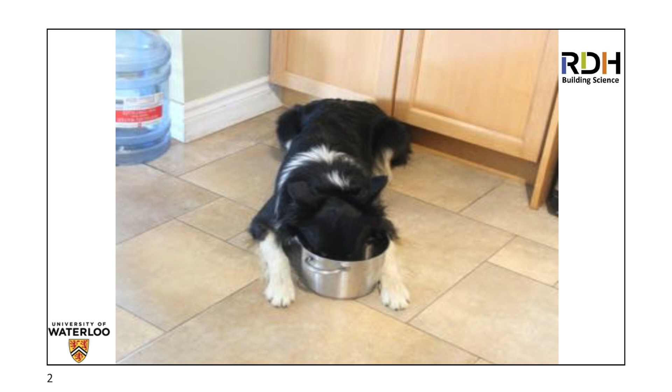Now, I also recognize that I had to have dog pictures in the presentation, so I managed to update this over lunch. This was you folks only half an hour ago. Right now, I want you to be like this. I am paying rapt attention, and in the next hour, I want you to do that.

When I point out some of the physics behind everyday moisture events, I'm going to talk about capillary, or capillary forces, I'm told it's one or the other. We're going to apply this to drainage of walls, leakage of windows, rain penetration.

My focus, other years I've talked about pores and how water is wicked into, say, brick or wood, and those are tiny pores. We're going to look at the comparison and why it's actually different when we get a little bit bigger. That transition is what matters from a building science point of view.

So I actually gave a size range there, 0.02 inches to 0.5 inches, for very important reasons. This remote control is not very remote.

So yeah, capillarity has been around for a long time. One of the drivers behind this presentation was some legal work I was doing, and I assumed that experts testifying in a legal case would know about capillarity and which direction it acted and the relative magnitude. I was a bit surprised and taken off guard that they didn't.

A big part of what we've done a lot, we call it our Alexandria project, actually Alex Lukachko coined that, about scanning really good research and putting it digitally online, because then it exists again.

The last person's name on this list, James Jurin, is actually one of the people most often given credit for the law I'll describe to you for capillarity. But the problem with James Jurin is he just proved and identified capillarity and showed its significance. The people who put math to it were Laplace and Young, and so oftentimes that's who gets named. They did nothing about the capillarity experiments themselves, but what they added was a mathematical understanding. So you might hear those names sometime.

Just going to quickly talk here. I always talk quickly, I guess. I'm going to have a short chunk where I talk about background science. That was a bit faster than I had intended.

So the water molecule, just to recollect, for those of you here in 2018, the special thing about this cockeyed Mickey Mouse molecule is that the ears are a little bit positive and the body is a little bit negative. Because that makes one side of the molecule a little bit negative and one side a bit more positive, we call this a polar molecule.

Water has poles, and it really influences how things behave. The way water sticks together massively influences huge effects all across the sciences, including very much in the medical sciences. But there are two forces we want to look at when we talk about how water molecules interact, how they stick to each other, how they're attracted to each other, called cohesive forces.

Those polar molecules, the negative sticks to the positive, and we end up with liquids that have viscousness. That's a word. Some of you looked a bit dubious, but no, it is a word. It also brings up the surface tension thing.

As you move to an interface between water and, in this case, air - but it could be alcohol, could be helium, depends, but for building science it's water, maybe a little alcohol - the surface actually has no molecules above it to connect to. So it has the same positives and negatives and same desire to be attracted to stuff, but there's nothing above, so it grips more strongly to the ones beside it.

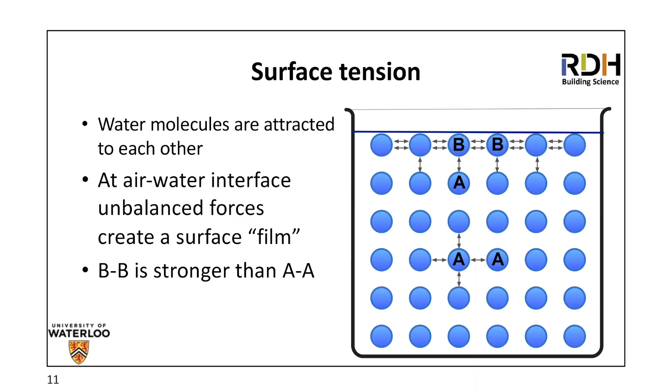And this creates what people have often noted, like a film on the water. That strength of the film is called surface tension, because it's a tension force - that's how we measure it. It's harder to measure compression because the water just goes blurp. That's the noise it actually makes in a microscope. But the tension is something you can measure.

You don't believe me, do you, Achilles? You do, yeah - you've seen the microscope.

It doesn't blurp. So the surface tension, I think everyone knows - that's why we can float a pin on the water, or why these bugs can float on the water, because there's enough surface tension.

And the way you measure this in real life in a lab is you get a platinum circular ring, a little wire made of platinum, and you set it in the water, then you pull up on it and measure how much force it takes until the ring breaks through. You measure the length of the ring and figure out the force, and the answer is 0.072 newtons per meter - and you don't care. And you shouldn't care, I'm just telling you there is a number.

Water is also attracted to other materials. It's not purely narcissistic and attracted to itself. It is also attracted to materials, but not all materials. It's attracted to all water molecules, but not all materials.

So some materials are water-loving, and they're called hydrophilic, coined by Achilles, that's why it's Greek. And hydrophobic means they're water repellent, another Greek term.

Now, the way we describe materials that are water-loving, hydrophilic, you measure it, right? So obviously we have to measure it to be scientific about it. You put a droplet on the surface, and if it flattens out with an angle of less than 90 degrees, we call it hydrophilic.

It's actually a little more complicated, because if you put a very small droplet, it does tend to be kind of flat. As you make the droplet bigger, it bulges up until it starts to flow - it's just before it starts to flow after bulging up. That's what it says in the ASTM standard; that's the actual angle you're supposed to look at.

So if it's hydrophobic, like a waxed car surface is - you're using wax, maybe people still wax their cars - when water droplets form, they form more blobby, like that.

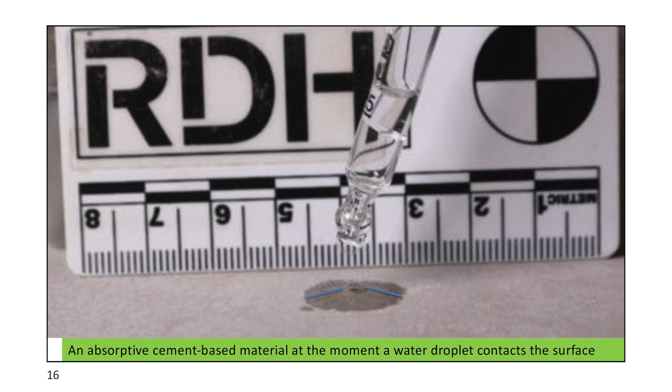So this is action photography, where a water droplet is just impacting onto a fiber cement sheet. The sheet, like many building materials, is water loving. Wood, gypsum, brick, concrete, fiber cement - they're all water loving, and you know, it's sucking the water in. In fact, it's hard to make a droplet because the water is being sucked into it.

So many people get excited by hydrophobic coatings because they think, if all I needed to do is cover my jacket with hydrophobic material, or my building, water wouldn't leak in. And that's true in theory. In theory, communism works. And in practice...

There's little bits of dirt that accumulate on real life surfaces. So even though we can make quite hydrophobic materials in the lab, applying them in the field is always balanced by the fact that eventually there's dirt and it changes them. So there's a limit to how far we can get in hydrophobicness in real building materials.

It's a little bit like reflective coatings or white roofs. You can paint really, really white roofs, but unless you have really, really white dirt, the reflectivity doesn't remain the same. So we pick a number that's lower than what it is in the lab. If you're lucky, you can live even better - you could live in a place with shiny dirt. If you have shiny dust, it'd be great to have reflective roofs. But we have dirt that isn't hydrophobic, and that means there are limits.

Now, if you're doing 'science' - I put quotes around it because I don't really do that - you put water on glass, a commonly used material. It's well characterized, and silicon dioxide, which glass is, makes up many mineral-based materials. There's a lot, like concrete, gypsum, and bricks. There's a lot of silica in some of these products, so it's often used as a surrogate for mineral-based building materials in studies.

Here's a water droplet put on a piece of glass, increasing larger and larger by a tenth of a milliliter or less at a time with a hypodermic needle and syringe, until it starts to flow. There's an angle measurement there - there are more sophisticated ways to do this properly. I'm showing you this because this is the water and glass I'm going to use in subsequent experiments. The reason the water is blue is because I put food coloring in it; water isn't actually that color. Just saying for the first-timers in the crowd - you would have learned that if you'd been here before, but no.

So that blue - now that is a flashing material, a peel and stick flashing material, which are often either butyl or SBS bitumen, with a facer of some sort of polymer, often HDPE, sometimes with scrims of polyester. This happens to be high density polyethylene, HDPE. There are various types of PE facers, and it is quite water repellent, as you can see from my bulging droplet. I wouldn't just show anybody a bulging droplet of mine.

So one of the things we learn is it's not just the dirt that matters, but also if I take the droplet and tip it on an angle, you can visualize that the front of that droplet has a steeper angle than the tail. And this is a real test - people really do this with sheets of glass and very carefully calibrated equipment to find out what the angles are, and that's how you're properly supposed to characterize a material's surface response to water.

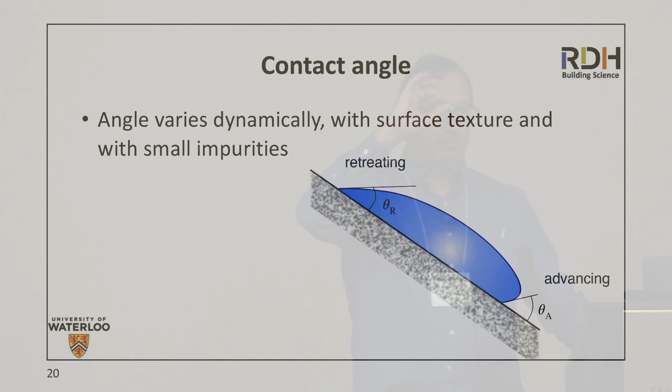So I'm telling you there's an angle that you should say is wettable or not, but actually the angle varies. People who are measuring this stuff will honestly find out that it varies depending on which track it takes down the sheet of glass. The glass you're looking at is actually lab glass, which means it's more expensive, but it also means it comes with a sheet that says what's in the glass, so you know what it is - but it's flatter than normal glass. And even so, when I put a droplet and run it down the surface, the droplet will have a different angle as it moves down by a little bit.

So all of this is to say, like many times in building science, getting obsessed about the decimal place is a waste of effort. This is a game of hand grenades - you just got to throw it in the right direction. We're not really looking at marksmanship here.

Although most of this stuff had been written down in papers you can't even find in our library—my university was founded in 1957—there are papers often in obscure areas of research where they are reinventing capillary science. This one comes from the School of Dentistry, which is actually very useful. Capillarity matters because we have a lot of water in our bodies, probably 70-80% water, so understanding how water moves is important. In dentistry, they're all about cracks and holes, they want to fill them up, so capillarity is an area of real interest with different materials.

They did some interesting research in this paper, and table II shows results with different materials—not just water and glass, but water with acrylic, silicone, Teflon. Teflon is highly hydrophobic, so if I wanted a baseline for hydrophobicity in my lab, you'd get a sheet of good quality Teflon and it really beads up. Most WRB materials are hydrophobic-ish, which isn't really a word.

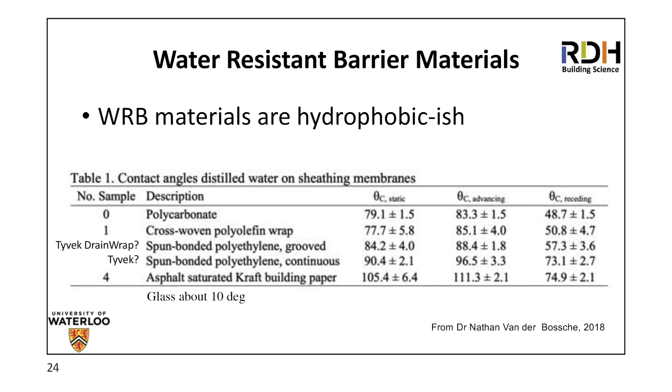This is from Dr. Nathan Van der Bossche, some of you may know him from Belgium, who does good building science research—static angle, advancing angle, receding angle. I like the honesty where he reports plus or minus 4 and 3, and tells you he measured this 16 or 24 times since it varies a bit. Polycarbonate, like Lexan, is quite hydrophobic, but cross-woven polyolefin wrap—I think textured polyester—and spun-bonded polyethylene, probably Tyvek, and spun-bonded polyethylene grooved is almost certainly Tyvek DrainWrap. If you look at Tyvek, a high-density polyethylene, you'll see it's around 90 degrees, right on the borderline to hydrophobic, but it's also relatively lastingly hydrophobic, which is a good thing about it.

Notice that asphalt building paper, when it's new, is really quite hydrophobic. But if you leave it exposed to the sun for a while, it gets less hydrophobic. If you put it on a building for six months, it blows off, and it really reduces its angle as it flies into the neighbor's property.

The reason we care about these water properties is that there's attraction of water to a material if the material is hydrophilic—water will want to stick to it, and the contact angle is less than 90 degrees. When we talk about cracks, pores, and holes, there's a lot of surface area for water to cling to, especially in small cracks and pores—a lot of surface area relative to the volume of water. That interaction, the large surface area with materials attractive to water, is what capillarity is all about.

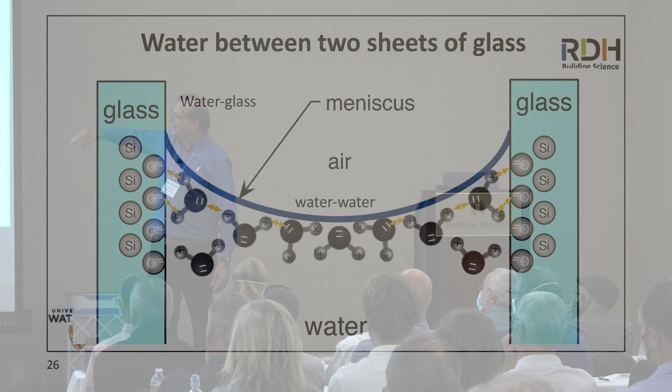If I were to look at a test tube or a real glass of water, we have the glass with silicon dioxide, and we have H2O. The positives and negatives will be attracted to each other electrostatically—there's even a bit of hydrogen dipole moment, weird stuff—but it wants to stick. That means water will try to stick to the glass and drag the neighboring water with it. One side wants to stick to the glass, the other side wants to stick with the water, so it says come along with me, and as a consequence, near the glass you'll see a curve.

You can do this in your kitchen—you can see it, it's only a little bit. It's called, what's it called? Meniscus, right? I think they're changing it, it's going to be 'peopleiscus' or something. But right now, it's still a meniscus.

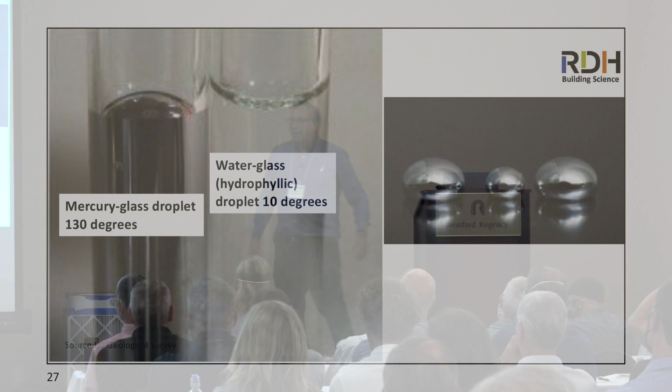Mercury is the equivalent of hydrophobic to glass. So if you put mercury in a glass tube, you get the inverse curvature. On the left-hand side, these are relatively small tubes, about a quarter inch diameter, thin-walled glass, so they're accentuating the curve. The curve is the same whether it's in a big glass or a small glass.

It's just that when you put the sides close together, the curves intersect. And if you put the glass really close together, not only do they intersect, they drag the water up from below. There's mercury, there's balls of mercury, so you can see the angle.

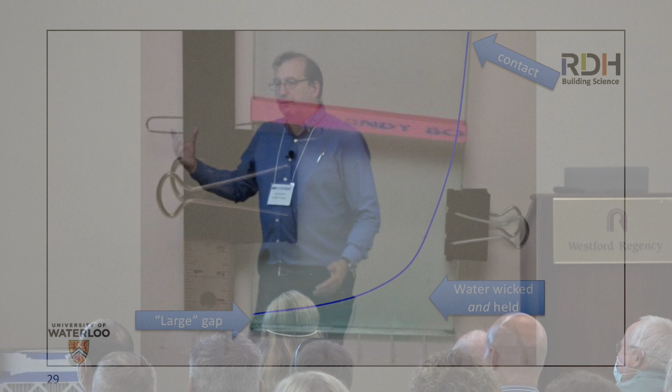On the right photo, I've turned these two sheets of glass vertically and set them in the blue water—the blue water is a lot like water. When I take it out of the blue water, the large gap has wicked up and held a small height of water, and as you get to the contact surface, it's wicked up quite a way.

If it literally continued, it would go up the 10-inch height of the glass. It's just such a little bit you can't see the coloring, but it will go 10 inches up the glass. So this is what the original people like Jurin observed—they knew that as the gap got smaller, the water was wicked up higher.

Now that wicking up higher, what's causing the water... why does the water wick up? Capillarity. What's causing it to go down? Gravity. Does everyone get that? Right, okay, so no high school grads here. The water that curves like that, it's the balance of forces between gravity and the capillary attraction of water to glass.

Now, gravity is pretty important for buildings—I'm a big fan of respecting gravity. But there are other forces that happen, and most of the time in this context we're dealing with air pressure. So we're also going to look at both how gravity affects this and how air pressure affects this, because both of these things matter in the cracks we are going to talk about.

So, how much does it wick? We can predict this with pretty good accuracy, but not perfect accuracy. If you're a judge and you want to know how much the water wicks up to within the nearest 1%, you can't really, because the world varies by more than 1%.

But we can give you a good estimate and try to put bounds to it. The good news is it doesn't usually matter—you just need to know it relatively close to make decisions.

So when we talk about capillary suction or capillary pressure, we usually use units such as pascals or PSI, depending what unit space you're on. But you can also report it as head, assuming that you're only interested in vertical.

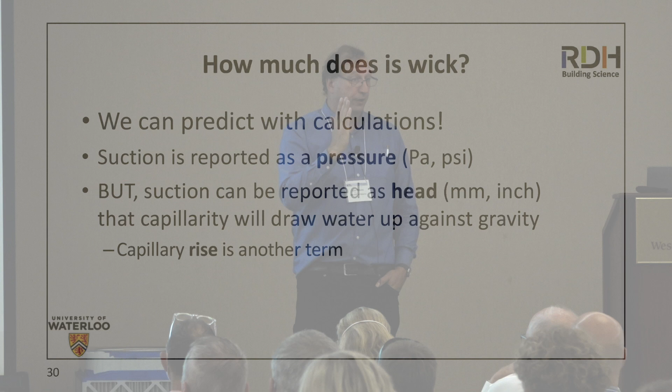Because if I put it horizontal, gravity is not stopping it from wicking anymore, right? So if I take those two sheets of glass with the water and that nice exponential curve and turn it sideways, the water will actually wick horizontally into the small gaps because gravity's not resisting it. But assuming it is vertical, you can report it as head—how many inches of head, or like pressure sensors in the HVAC business measured in inches of water column. That's all water in a vertical direction.

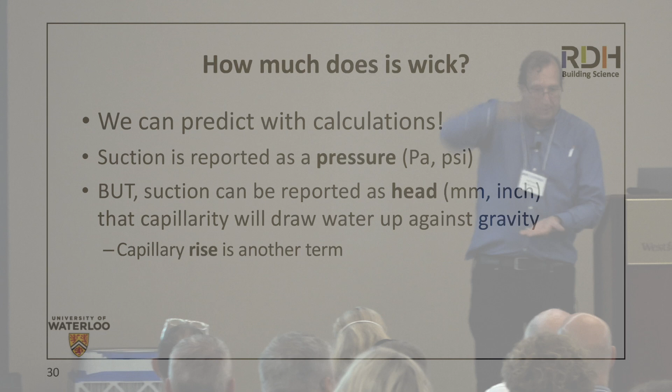So those are the units I'll talk a little bit about. I also mentioned capillary rise there, just so you have the words people use. Capillary rise assumes it's working in this direction, but it's actually working in all directions—it's just that's the one we're normally worried about.

Don't quote me out of context on that.

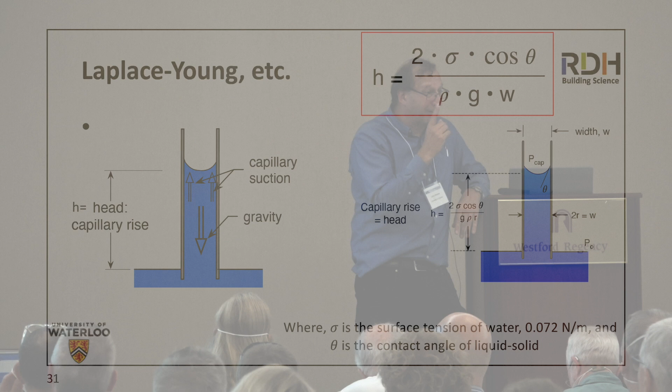In practice, a big challenge is that we often don't know how big the crack is. In fact, when looking at cracks, as building scientists spend far too much time doing, the cracks are rarely a single dimension - they vary quite a bit. The other problem is we don't know what theta is, the angle, unless we're doing water and glass or water and HDPE. But when it's water and 87-year-old cedar, it's a much more difficult theta to know about. So if you want to do a calculation, you often have to do a little background work to collect data on what's going on.

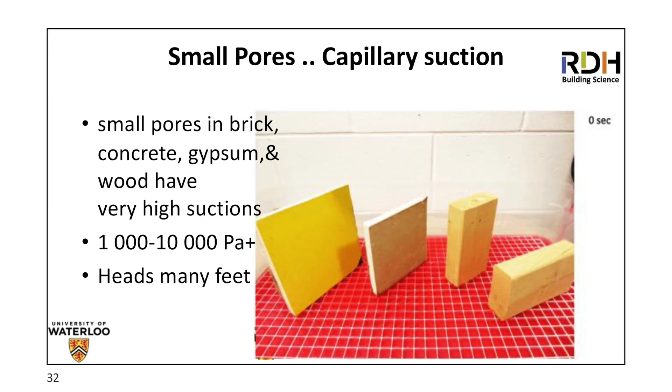The small pores I've talked about in the past are the ones in gypsum, wood, concrete, and brick. These will wick water, often to heights of yards at the least, but it takes a long time. So here's a free takeaway: water flows through very small holes more slowly than through big holes. When you have very small holes, although they suck a lot, they don't allow a lot of flow through quickly - it just takes a long time. So the smaller the pores, the more pressure, and you can get yards of lift, but it's really slow.

Clay soil will wick water 10 yards, no problem, but it takes near enough to forever to put water through 10 yards of clay - which is why people use it to line garbage pits, where we put our toxic waste. We rely on capillarity to not have it leak through the clay. Whereas sand will only wick water maybe a few feet at most - if it's good granular sand, only a few inches - but water will pass through that very quickly.

So there's this trade-off. The cracks I'm going to talk about aren't any of those - my cracks are going to start at maybe the coarse sand and move their way up, the cracks you and I can see between building components or within panel products, etc.

How much of a factor is the temperature of the material? It's a non-trivial factor - it depends on what your accuracy is. But within the realm of normal building, the temperature of the water affects things plus or minus 10%, plus or minus 15%, depending. And when you drop below freezing, it doesn't matter at all.

The next ones are 1/1000th of an inch and 1/10,000th, the size of the pores in brick or gypsum or something. Those pressures start getting to numbers like 118 pounds per square foot, 1,180 pounds per square foot. That's how clay gets turned into adobe, right? You make it wet, you mix it up, you let it dry out, and it's held together by residual water, and that's why its compressive strength will be in the order of 1,000 pounds per square foot.

That's why you don't want too much coarseness in it, because that means it'll be weaker, but if you put too many fines in it, it's so strong it starts to crack, and the adobe breaks. This isn't about adobe, I'm just pointing out that if we were to talk about stuff like that, I would talk about adobe.

But we're not going to talk about that, except to say that it should be obvious from a simple tabulation that porous materials like brick, gypsum, adobe - you can't make water leave them by blowing air on them. By the time you get enough wind pressure to do that, the building is in the next state.

So you can't say the brick leaks. People have said the brick leaks on forensic investigations. I don't think the brick leaks. No, I'm pretty sure it does. No, really, look, the brick leaks. Here, look at it right there. That's a crack. That's not a brick. That's a crack in the brick that leaks. And that matters, because who are we suing - the person who made the brick or the person who made the crack? The person who made the crack.

So there are reasons to be precise about what's leaking. Even when we're talking about mortar, it's possible that mortar could leak if it were just really coarse sand with not enough cement in it. It's possible, but it almost never happens. Most of the time, it's the crack between the mortar and the brick, or the crack in the brick, or the crack in the mortar.

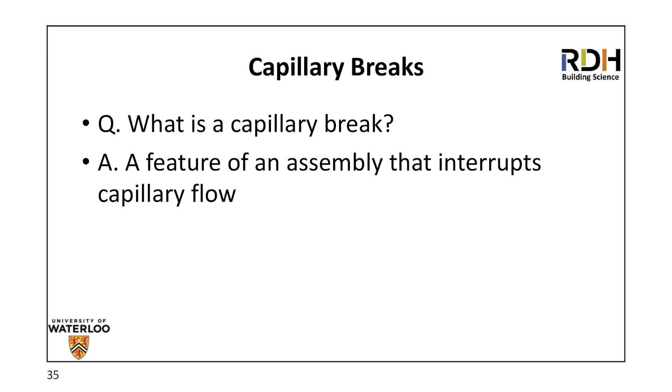But what is a capillary break? I couldn't find a good definition because most of the definitions described materials and such like that. So here's my attempt: a feature of an assembly that interrupts capillary flow. So capillary suction through materials or cracks or openings is interrupted by something. And I want to talk about the somethings that you can interrupt capillary flow with.

So one way we could stop capillary flow is to have a gap. And the reason that works is that small pores suck more than large pores, right? Everyone gets that? A gap is just a large pore. It's sufficiently large to interrupt the wicking of the small pore on the top and the small pore on the bottom - it won't wick. That gap, just theoretically speaking, could be quite small and still interrupt it. Some people think a capillary break needs to be a 1/4 inch, pick a number, 1/8 inch, an inch. And that's not at all the case for almost any building material.

It isn't the case for any building material I can conceive of that you would need a gap that large. You need a gap, but it doesn't have to be big. So we're going to work through a number of reasons why I'd have a gap and explain what the size needs to be for each.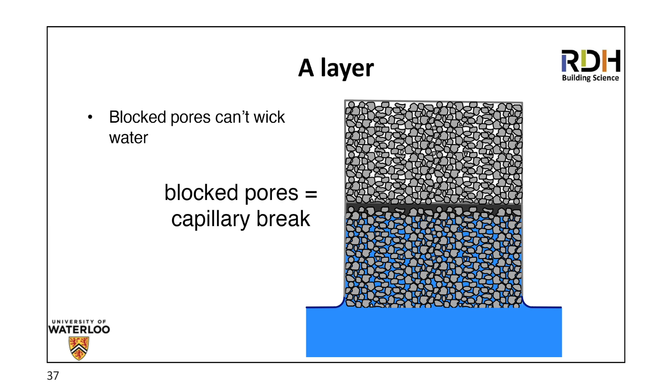Now, I could also not have a gap at all. I could have a great detail and have no gaps. And the way to make that work is to actually seal off the pores, so it's not that the pores aren't too big, there are no pores. So this is an impervious material in that we've filled all the pores with some sort of goopy goop.

There's a lot of goopy goops available on the marketplace, and usually they're like polymers of some sort based on dead dinosaur juice of some degree or other. And that fills the gap. Actually, many of them work by using capillary suction to bring that material into the pore structure so that it bites in and holds on. Otherwise you'd paint it on and it would just peel off. I'm sure you've seen products like that - it's not usually an advertised feature.

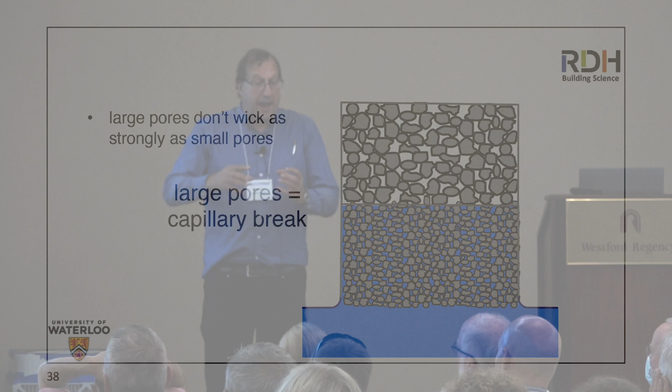But you can also have a large enough pore structure in the two materials that are touching each other. This is hard to do because unlike my drawing, there is a wide range of particle sizes and void sizes in real materials. So when you put two materials together, you have to make sure there really aren't any small pores, otherwise it will join up with small pores. It's hard to do, but it's theoretically possible.

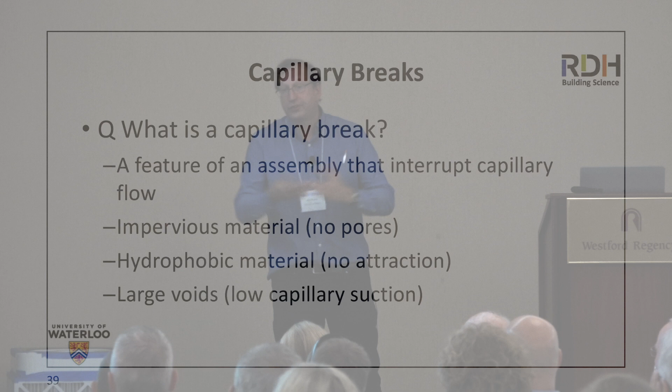So we have these three options: we can have an impervious material, large voids, or we can make it hydrophobic, in which case there's no capillary suction. If you have hydrophobic materials - if you were to wax a material or coat it with a silicone or something like that - it would also not wick water. Again, the challenge with those coatings is how durable and uniform are they? But they absolutely work, and as long as they don't get too polluted by dirt and decay, they will continue to work.

So here, this is a plot - it's a bit early, not yet its 50th anniversary. This was published in 1974 by our very own Dr. Mark Bomberg. Where's Dr. Bomberg? I think he's around here somewhere. Right over there.

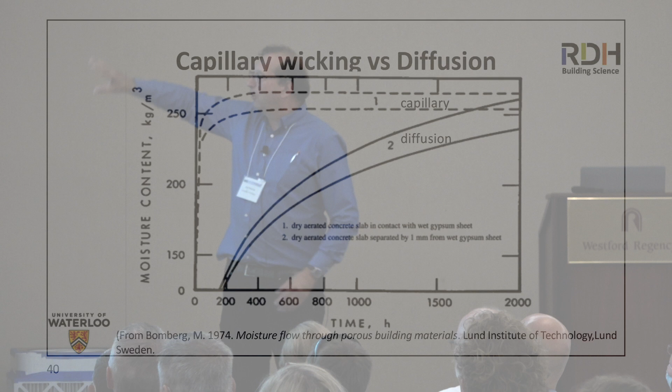So Dr. Bomberg wrote a report, actually on moisture flow through porous materials. There's a whole bunch of good stuff in there, but no one reads it. This is something I'm going to take out, and what he did here - I love this chart, Dr. Bomberg, because it's so indicative to people who are science-based to look at - he takes a material and either puts it in contact with a wet surface or separates it by a 1 millimeter gap. The plot on the left is what happens when the material is put in contact with the wet surface. In a matter of a few hours, the moisture content rises up and gets saturated.

We call that capillary saturated because all the capillaries are saturated - it's kind of weird jargon. That's the moisture content it stays at. The two samples labeled number 2, for diffusion, we put a 1 millimeter gap. This doesn't mean the material above doesn't get moisture, it's just not transported by capillarity. So if I put a piece of wood 1 millimeter above water, capillarity will not wet that wood, but vapor diffusion will. And this actually comes up a lot in practical situations when dealing with moisture sensitive materials and built-in moisture content: it doesn't take much of a gap to avoid water wicking across, but you might need to do something to stop water diffusing across.

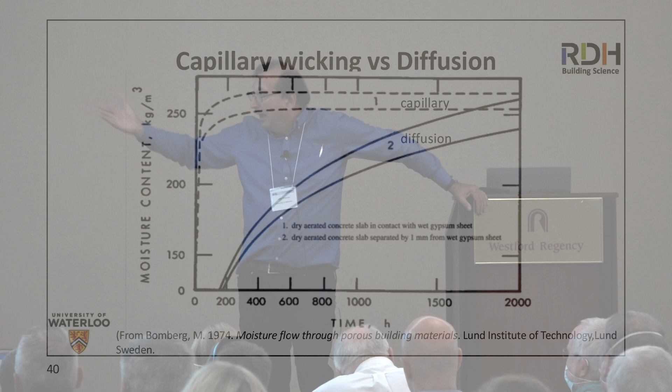And that's where damp-proof course comes in - that's where we're actually applying a material that not only blocks the pores and is capillary inactive, but also has so few pores it doesn't let vapor diffuse through it in vapor form. Now, the thing about diffusion is it takes a long time. In this case, obviously Mark had a lot of patience - this was running out to 2,000 hours, which is like 3 months.

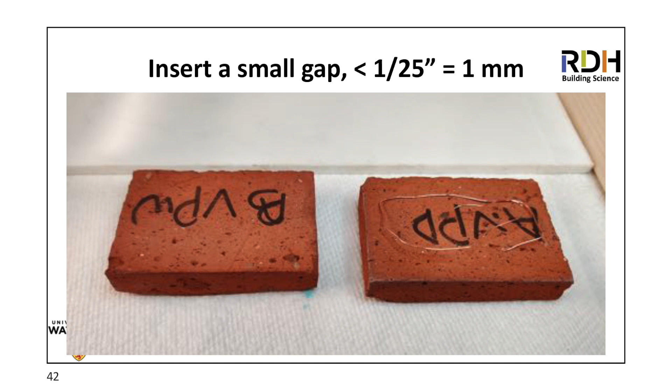I didn't have a paper clip, so I used some telephone wire - 28 gauge telephone wire with the insulation removed. That's the spacer we're using as a gap. It doesn't block much of the area, but it does separate it - roughly a millimeter, a 25th of an inch, probably a 32nd, something like that.

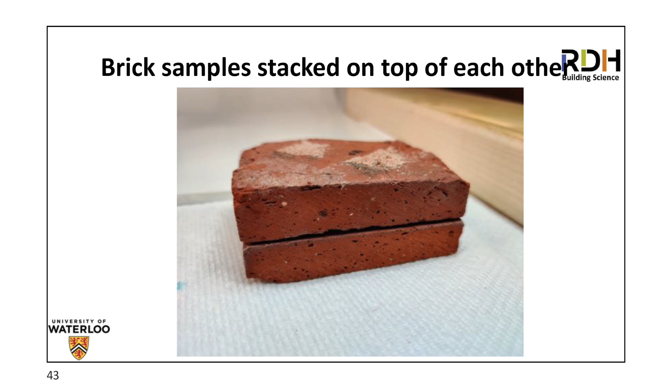They were stacked on top of each other, and you can see the crack is visibly larger. Now what happens is the bottom gets wet and the top doesn't, although we were wondering, okay, it should eventually get wet by vapor diffusion. But the problem is in this experiment the brick is exposed to the lab atmosphere, so yes water vapor is diffusing across, but it's also drying out.

After 4 or 5 days, luckily my experiment came to an end and I didn't have to wait till the end of winter. This basically didn't show anything at all - it just stabilized and then started bouncing with the RH in our lab, which runs at 50% plus or minus 3%, something like that.

I was noticing, oh, it's starting to pick up a hundredth of a gram. Oh, it's down a hundredth. I wonder what's going on - oh yeah, the RH is varying a little bit, and that's the only reason it was moving.

When I plot the moisture versus the square root of time - why the square root of time? Complicated mathematics, but that's what's done. The bottom brick, I'm drawing in red, but really it transitions at the start of the green to the next brick. It soaks up until enough points of contact are connected to the brick above, and then it starts feeding the brick above. It took about 3 times as long to wet the brick above than it did to wet the brick below, following the square root of time, but it got there pretty quickly.

Whereas when we did the other test with the little gap in between, the bottom brick gets wet, and the top brick just bounced around a few hundredths of a gram up, a few hundredths down. A gram is a small unit of mass, for those of you who aren't familiar.

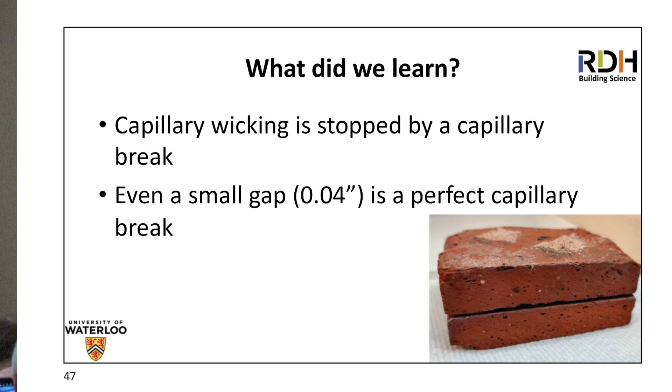So what did we learn from this? Capillary wicking is stopped by a capillary break, and the gap size can be really small. I'm saying a gap of 0.04 inches because I tested it - I didn't test 0.02, but I tested 0.04, and that's good enough to be a capillary break. It doesn't stop vapor diffusion, but it stops capillary flow, which depending on what you need in your design or what you're trying to understand in an assembly, is all you need.

So why then do we often put bigger gaps in buildings, particularly behind cladding? Why do we put bigger gaps?

Well, the first thing is we know the answer is not to make it - we don't need a 1-inch gap to make a capillary break. We don't need a 1/4 inch or 1/8 of an inch to make a capillary break. So there's got to be other reasons. Let's look at what some of those reasons might be.

The next reason we're going to dig into is we might be trying to avoid bridging of the cavity. I'll describe what I mean by that. But then we'll also look at drainage. Another reason we might want a gap is that we want to encourage drainage underneath this roof membrane or behind this vinyl siding. So that's another reason we might have big gaps.

When we talk about bridging, I'm looking at something like this scenario. On the left-hand side, I have water running down the backside of a cladding, and those little droplets are drawn because that's kind of what droplets look like - I'll show you photos in a bit. If the gap gets smaller, eventually the water droplets running down the back of that outer layer are going to touch the inner layer. It actually happens very fast, even at 60 frames per second - like 2 frames, and it goes from a droplet to a plug of water. It's just boop, and now it makes that plug. It doesn't make that noise - I know it doesn't make the noise.

I'd had this drawing around for a long time, but I didn't know the size of those droplets. I've asked people how big they think a water droplet is running down, and most people have a pretty good idea - it's not that big. So I always knew that we don't have inch drainage gaps behind cladding to stop water drops from bridging across. If the droplet were that big, you wouldn't be on planet Earth - you'd be in a much lower gravity scenario. Then it'd get bigger, but that's not what we're dealing with on Earth.

So the strategy we took in terms of measuring the size of water droplets on a surface is that we measured the water droplets on a surface. To start with, we used glass and then went to HDPE - glass is easiest to photograph. You'll notice the water dripping off the bottom, but eventually if you put enough effort into measuring the droplets, you'll figure out how big a droplet has to be before it runs down. It depends on what the surface is, but it's actually a pretty definable number for a particular surface - a particular size. The hardest part of those experiments is making sure the needle doesn't vibrate too much because of the excitement of it all.

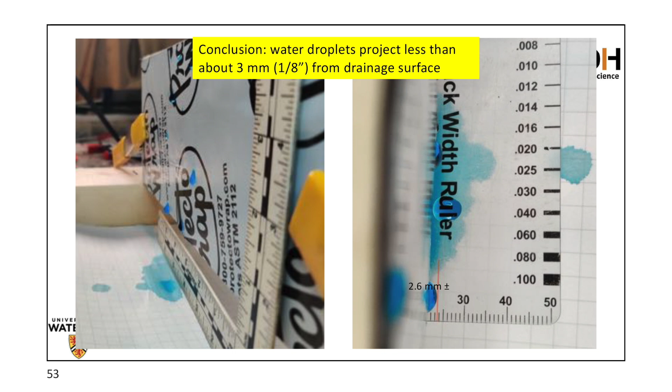Here's some examples. This is a water-resistive barrier on the left-hand side, a peel and stick membrane with an HDPE facer - see the droplets? They look just like a droplet. This is looking from the top. You take a photograph, highly zoomed in, focused there, and this particular drop in the middle has already fallen down. The one on the left is the one that's hung on the glass: 2.6 millimeters, plus or minus 0.1 millimeter. It depends a little on what the material is, but I've never measured a drop more than 3 millimeters that wasn't moving. If you juice it, you can get a bigger drop, but water droplets are generally under 3 millimeters, which is less than 1/8 of an inch, just in case you're wondering. So now that you know that, you can go home from summer camp with your $1,200 well spent.

What we do know, though, is gaps over 1/8 of an inch won't bridge. So if we're worrying about water bridging from one side to another, 1/8 of an inch is going to be enough - plus, of course, dimensional variations due to construction and operation and so on. So with brick, that would be 2-3 inches. That was a bit of a joke there.

But really the question is, why do you even want to stop water from jumping over the gap? There's discussion even in code committees - oh, we want to stop the water from jumping over. Why do you want to stop it from jumping over? Because when it jumps over to the other side, what's it going to find in most walls? A WRB, right? I mean, you'd be insane to have a cavity wall without a WRB on the other side of the cavity.

And rely on the gap, because the water's going to get across at windows and doors and pipe penetrations and wire ties and cladding attachments.

Now, I say that you'd have to be insane. Let me introduce you to the continent of Europe. In Europe, it is absolutely still considered normal that you design the cavity so that water doesn't come across it, and you don't use a WRB. Now they're starting to, and it has to do with building failures, but also with building failures of what type. They are moving to a lightweight building system because of environmental, economic, and resource reasons.

They're moving away from the standard two feet of rock into, how about we use wood studs with some OSB, right? But seriously, papers are being written in the last five years in peer-reviewed European journals asking: do we really need a building paper behind wood cladding on wood framing? Serious questions being asked by serious researchers, just pointing out there's still a lot for us to talk about.

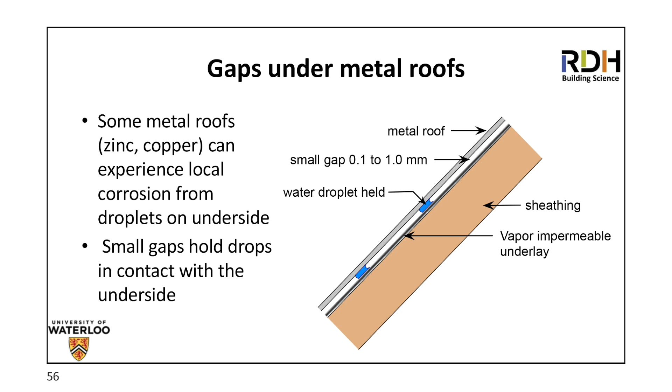When water gets through the metal, and it doesn't get through the metal, does it? It gets through the joints in the metal, the screw holes, you get condensation sometimes, but it doesn't get through the metal, let's be quite clear. It's like people saying, my metal's sweating. No, it isn't. It has not become a mammal. It is not. It's still an inanimate metal, so it's not sweating. And water doesn't go through it; it goes through cracks, holes, and openings. But the water gets there.

We know that, and it results in not a lot of water, so you end up with little droplets of water. Small condensation quantities, like night sky radiation induced, or small leaks that occur in metal roofs, are small enough that you end up with droplets. And what happens is you get corrosion, localized microcell corrosion between the wet bit and the dry bit. Excuse me if I'm using too much jargon, but that wet bit, dry bit transition allows for a little battery—not a good one, you can't drive a car with it, it's just a little battery.

If there's any VC people in the audience, no, you can't drive a car. All it does is create enough electric current to cause corrosion.

It doesn't happen on all systems, and I'm not sure we know why it doesn't happen on all systems. A normal painted metal has the backside painted, which protects it from corrosion. We know the problems occur in copper and zinc. Haven't seen it in titanium yet, but we don't do a lot of titanium. Maybe it's susceptible, though I wouldn't think so since titanium's pretty resistant. But this is a zinc roof with a touch of titanium to give it that dark color.

It's a company you probably all know of, a national leader in making zinc roofs. They had money left over on this project and said, how about we give the client a much better roof? So they upgraded from a 2-ply SBS bitumen, which probably only had a 40-year lifespan, to a solid zinc roof that would give 60 to 70 years.

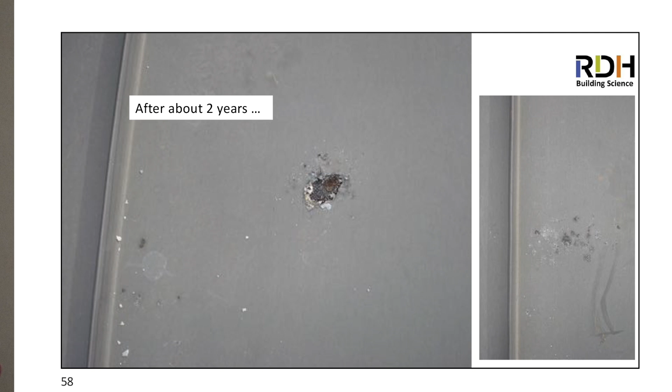What do you have underneath the zinc? Here they go. And I said, well, you didn't provide a gap underneath. They said, no, we just copied it right off the manufacturer's drawings, and those don't have that. They have the zinc roof direct-applied to a WRB.

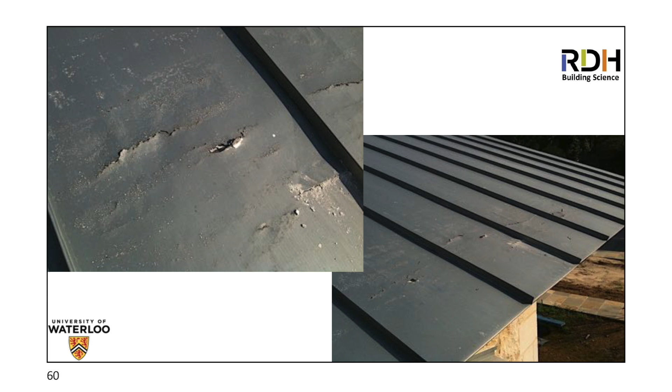This is actually in a relatively dry climate in Texas, and this was a few years later. One of the nice things about this picture, if you're not the owner, is the wrinkles. You can see the wrinkles in the WRB and how it held up water, causing corrosion -- you don't even have to take the roof off to know, though of course you do, because you've got to rack up the bill. But you pretty much already know this is another one of those.

In the last 10 years I've worked on or heard of dozens of these, and many are quite large, like 500,000 square feet in Chicago. They happen quickly, under 5 years, and you get holes through. The first answer is, well, we'll plug that hole up, we can just solder on it. Yeah, you can, but you're just going to come back next year, and the year after, and the year after.

So the only solution is, of course, the expensive one: you take it off, put in a gap, and put it back on again. Usually it's not the same 'it' as the first 'it,' which adds to the cost. That's the reason we want a gap.

This is one of the few examples where I had to start planning for bridging. When do I care about bridging? Oh look, I got something I care about bridging -- finally something where I give a shit about bridging. I don't want the droplet to be able to hang on the back of that zinc. So by making a 3 millimeter, 1/8 inch, or slightly larger gap, I can be pretty confident I won't have water droplets lingering long enough on the metal to cause local corrosion.

This is all about liquid capillarity, but the point is also that diffusion is going on here. And another reason you put that mesh in there is it enhances air exchange, providing convective drying, which depending on your details could be significant.

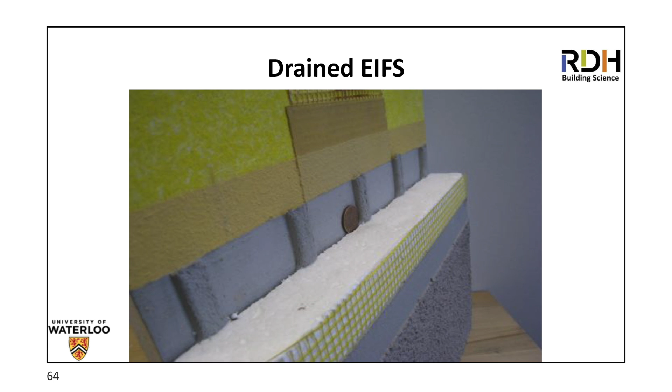People have poured water into small gaps and watched gravity do its magic. So there's a penny there—you can't see that it's a Canadian penny, but you're going to have to trust me. It's about the same size as an American penny.

So let's look at some of the historical research on these small gaps.

Bill Brown worked with the United States Gypsum Company, and they did publish a couple of papers, 1999-2000, where they looked at small gaps behind stucco and behind exterior insulated finish systems.

Teresa gets a call-out because actually you're the first other paper, other than Bill Brown's, where you talked about the development of, at the time, stucco wrap, which became drain wrap, which was the crinkle.

Those were laboratory-type investigations of tiny gaps, pouring water in, seeing how much came out, asking the question: is that enough? And that's why most of you will know drain wrap—I'll show you a picture later on—but it doesn't have a lot of big gaps, yet it drains like the dickens, right? It really lets water through.

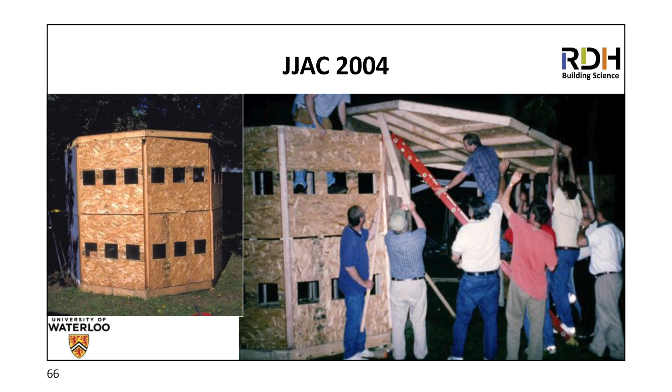This photo is taken as part of the JJAC project, and JJAC stands for John, Joe, and Achilles, and that was the hut, because we didn't want to say the other thing, so we said JJAC.

Oh no, maybe the C was Mr. Schumacher. So you don't see Achilles in this one, but Chris is the man with the white shirt. Joe is obvious. Kohta Ueno, who's still around—I think you're here today, Kohta, certainly around all week—is on the left-hand side. And Marco Liberte, I don't know if he's here, I haven't seen him yet. He's here, all right. But this was actually, we built a test hut.

This was during summer camp, so this summer camp we opened the outdoor air dampers to fix the building. This summer camp we started building this turret with gun ports, but actually those ports were intended to be able to inspect the back of the cladding.

You'll see Andre Desjarlais there in the blue shirt—he's directing the research, hand up, as he still does to this day. And I'm carrying the whole weight of the project on my shoulder. Chris, in the gray shirt, is trying to stop me from falling down. So not much has really changed, except us.

So this is two layers of building paper behind a stucco cladding. I hope you can see this from the projectors, but we poured water at the top, and we expected water to drain between the two sheets of paper, but it was astonishing to us that you were literally pouring the water in and it was coming out.

People had kind of surmised that, but with the proper budget and a crack team of high-level computer modelers, we were able to demonstrate that water did flow through small cracks.

Now I'm going to show you a couple of experiments where we take two sheets of glass, because they're transparent, put water in them, and then you can watch the water droplets fall down. I hope what's clear here is that at the beginning, water droplets are shaped like this between the two sheets. There's a curve at the top pulling up, and a curve at the bottom pulling up, holding that weight of water.

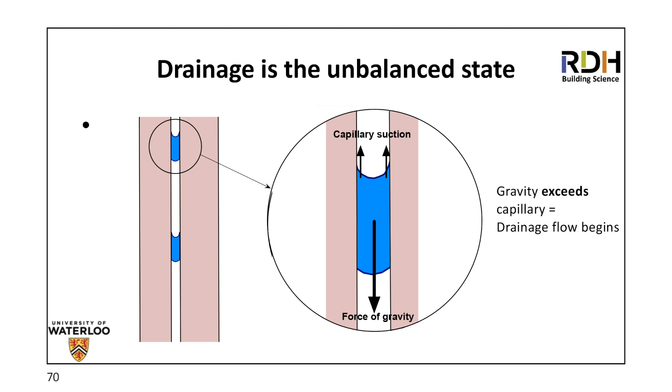As soon as I add enough water, the meniscus doesn't get any bigger. That curve is still there. The contact area is the same, but the weight of the water goes up. Eventually the water droplet gets big enough that the weight must overcome the adhesive forces since it's not getting any bigger. Now, if I add water and the droplet gets wider into the screen, then the adhesion is stronger because there's more contact area, but the weight goes up and you might get imbalanced. That's complicated - does it get fatter or does it get higher? What happens? Who knows? So you do some experiments to find out.

I want to point out that the gaps I'm going to look at in the next few are like 0.5 millimeter, which is 0.02 of an inch. Then we're going to look at 4/100ths of an inch, or 1 millimeter, and then around a 16th of an inch. Those are the gap sizes we're looking at because we're talking about drainage in small gaps.

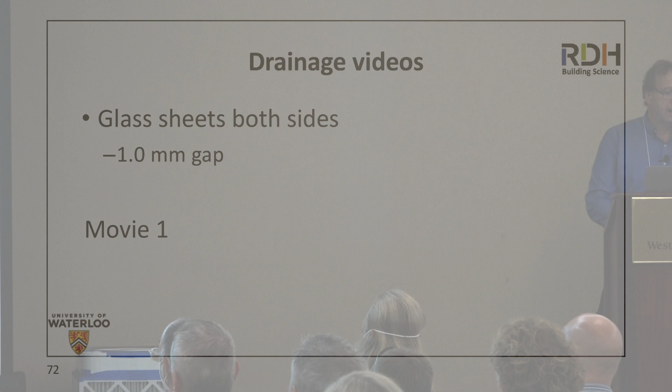So this is just to get you a little bit more into the dynamics of it, because it actually does matter where I'm putting droplets of water as they're running down. The first thing to notice is that the water runs down at a pretty reasonable speed - it's not like at an automotive speed.

It's running down, and also it's not running up, because the gaps are holding on to it, and when it gets to the bottom edge, the water clings to the bottom edge, giving it a little extra adhesion so it doesn't fall - unless you get enough. So I'm going to squirt a bit more in there. And then, oh, look at that! Did you see that? That was exciting, eh? So there are endless replays, and then there's the director's cut you can buy.

You'll see that now, if I put the water in slowly, it makes the droplet get wide. If I put the droplet in fast, momentum punches it through and it drops. So, oh, I made it too good - ooh, and it goes through.

And then we'll watch this for a little trick. Yep, capillary suction. The pores in that napkin are much smaller than 1 millimeter, and so, of course, it sucks all the water out of the crack.

One of the challenges is how do you make sure you know what the gap width is? If you can barely see those metal strips, those are from feeler gauges that are taken apart, so they're quite precisely 1.00 millimeters. And the glass is lap glass, so I know it's flat to within pretty good tolerances - not perfect, just good. So what we can take out of that is that with that size of gap, the water that's stuck on the bottom is pretty small. A little bit of water was retained, but water will also go through that - almost like poo through a goose. You put some in at the top and it comes out the bottom. It's only a couple seconds here, goose takes a couple minutes.

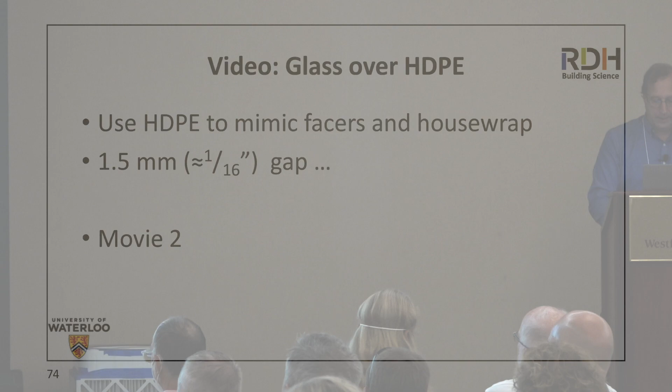Just to give you some dimension, there's a water droplet I put in that was barely the right size. There's a bit of a trick about ejecting droplets that are big enough to roll, but not big enough to roll right on through to the other side. You don't want the wrong droplet size, you want the right size. Okay, there are the drops.

But if you put more on it, it obviously will jump through. You see the shape of the droplets, and again I do the trick of wicking it up. Look at how much water is retained in a 1.5 millimeter gap with HDPE, hydrophobic, on the outside. The answer is nothing is really held in the gap, it's just water on the surface.

So that 1.5 millimeter gap, which is about a 16th of an inch, you're not really storing any water at the bottom.

Maybe a quarter inch, and you saw that sometimes it would move sideways, and there was a bunch of variations. So the next thing I'm going to do is use a small gap. We started with 0.04 inches, then went up to 0.06. Now I'm going to go down to half the size, this is 2/100ths of an inch.

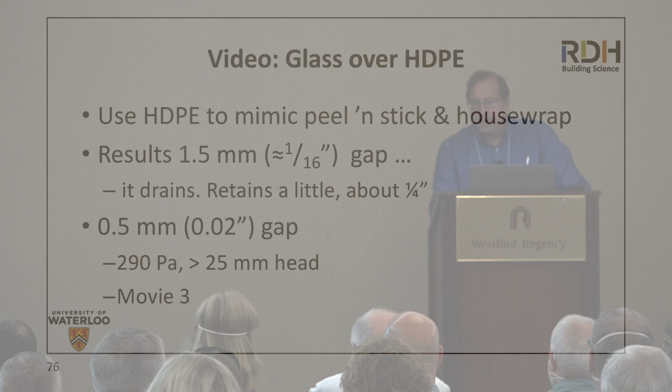This is much smaller than you would gap a spark plug, if anybody knows what a spark plug is. Sorry, you're not my graduate students. Is that an Uber?

So anyway, here we have this now pretty small. Now look, that droplet, I have to make it pretty big because there's lots more attraction, I have to make it a little bit more. And so it takes, and it also is hanging up at a higher level. So you can see, I'll get some water draining out. There's the droplet on the right side at the 2-inch mark. She dripped. So that tells you roughly, maybe, it's not really a quarter inch, more like a half inch, we'll call it a half inch.

So that's with a really thin gap, just so you know. So when people say, when I show the photograph of that eaves with the 1/8 inch or more crack, not 16th, and people say 'oh come on, surely that doesn't drain,' it's like, surely you've never done it before. That's all I can take from that. It should be clear that a gap that size can drain a lot.

Now we're going to talk a little bit more about, well, is that the reason we're making gaps? So it does retain more, and we learn from these videos and many more, if you get the whole DVD, if you have a DVD player somewhere.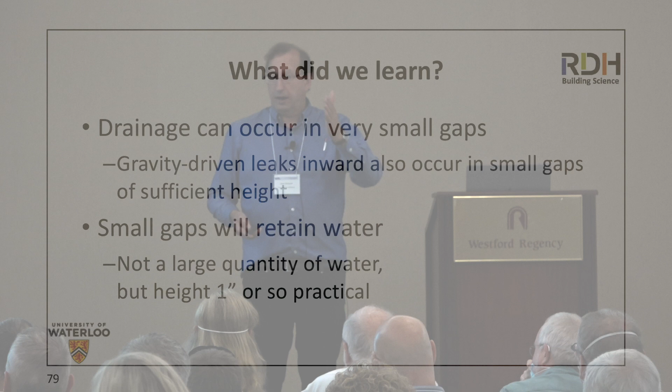Water can drain in very small gaps, but people don't seem to recognize the importance of the opposite: it takes a very small gap to let water in. So if you have a crack between an aluminum trim piece, say an aluminum extrusion on a curtain wall, and a snap aluminum extrusion onto it for a trim, that crack's in the 0.02 inch range. Those cracks will actually wick water in, and they will leak enough to be annoying to some people who like dry.

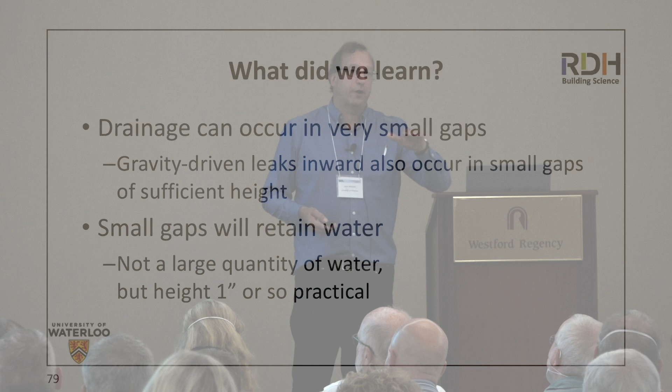The gaps will retain some water, but actually the quantity, because the gaps are so small, is very, very small. I didn't show you, but I've also done measurements where we've measured how much water sits on flashing. Short answer: the water that would sit on aluminum flashing is literally an order of magnitude more than would be retained in a small gap at the bottom because of capillarity. So if you're worried about water being retained, I'm not.

They also have gaps large enough to stop drop bridging. We have gaps large enough to allow ventilation drying, which could be quite important. And then we have gaps large enough that they can spread fire, large enough to house pigeons. So at some point you want to say, how big do I want to get? Do I want to encourage fire to move up the building? Buy a European cladding system, because they provide a good 2-inch gap, maybe 4, depending on the model.

And yeah, that's a good way to spread fire. Okay, and at the 4-inch level, yeah, that's not only enough for like pigeons. I mean, that's where you can start providing housing in New York City.

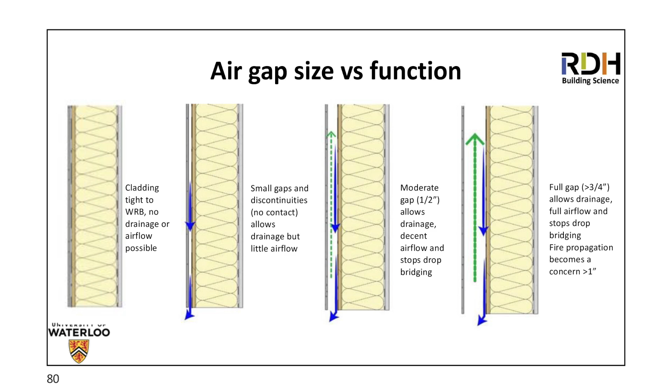And so the gap sizes - it's not always more is better, or it needs to be bigger. There are real functional reasons for gaps, and there are pros and cons that we need to balance to get the best outcome.

We also use dimple sheets. Often gaps are 1/4 inch, 3/8 of an inch, and below grade, but again, real track record of practical performance makes a fundamental difference - way better bang for buck than any waterproofing product you can buy. But do the gaps need to be 6 to 10 millimeters? No. But if you want to make a sheet with the physical properties that dimple sheets come in, they end up being 6 to 10 millimeters thick.

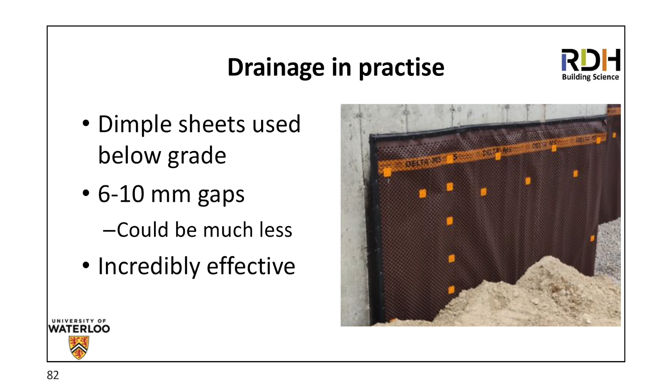And again, people think, oh, it has to be that big to let the water through. No, unless you're draining Niagara Falls - then they probably need to be bigger. But if you're not draining the Hudson River through your foundation, you can probably get away with smaller gaps.

So we're also seeing these gaps come into behind stucco. Now, the gap that we currently have behind stucco in the code is 2 layers of building paper, right? Or maybe a building paper and a drain wrap or something like that. That's a pretty small gap. And so the code requirement is moving in wet areas to increasing the space.

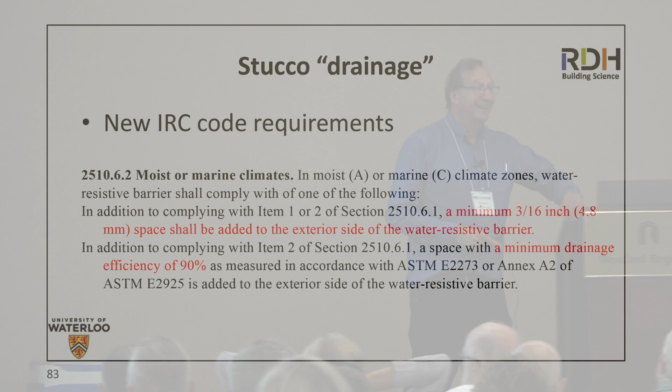So have you read any of the reports about why that's being done? Have you seen the physical tests of real buildings? No, because there aren't any. But it doesn't mean it's a bad idea.

But the gap is not likely to do much for drainage. It is likely to help with ventilation drying, even a little bit. It is likely to limit the amount of bridging from the wet stucco side to sitting on the WRB. And some WRBs don't like having water sit on them. Let's say they were made of paper - then you might be worried about long-term exposure to water. And so this is almost certainly an improvement in performance, but you can't argue it's because we needed more drainage, because there's not really a lot of evidence for that.

So, but it's coming to our code. Now let's talk about, in the last 10 minutes I think I have here - is that right, Joe? Yes. Okay, so many of you must have seen this image of rain penetration, right?

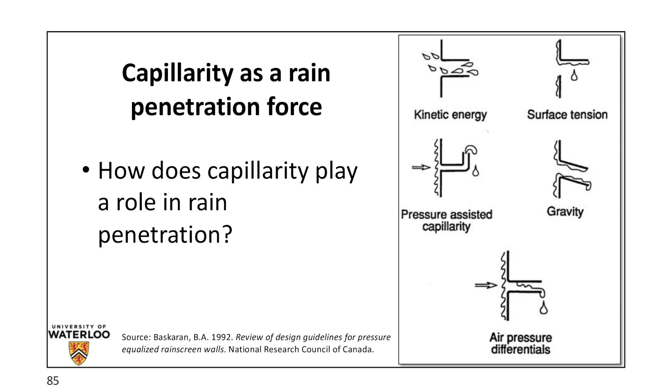So when you talk about capillarity, it's not just about capillarity—there's a whole bunch of other stuff going on. Here are some examples of gravity-assisted capillarity.

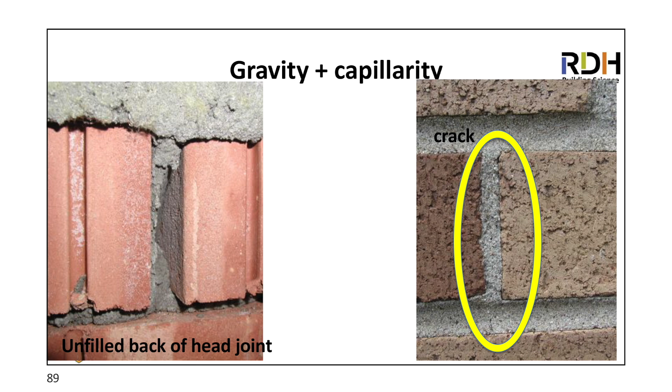Now, a version of this is pressure-fed, gravity-driven capillarity. The crack on the outside of a brick veneer wall tends to be on the vertical joint, because the mortar shrinks relative to the brick and separates. The horizontal brick mortar also shrinks, but the weight of the brick keeps that crack small—the brick doesn't end up floating in space. So it squeezes down, whereas on the vertical joint it opens up. When that happens, water can wick in, and those cracks are exactly in the range I'm talking about—literally 0.02, 0.01 inch, up to 0.05, 0.06 inch. By the time they reach 0.1 inch, people call them deficiencies, but below that, they're just normal.

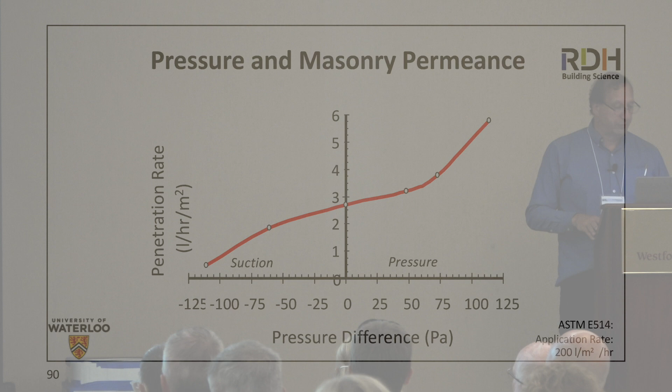When you apply air pressure across the brick—first, with no air pressure, you spray water and it starts flowing through. That's wicked in by capillarity and pushed out by the head of gravity of the water that builds up, which I'll show in a moment. But you can actually calculate the average size of that head by applying negative air pressure to see how much pressure it takes to push back and stop water from leaking in. That's what this experiment is about. In this particular brick wall, minus 125 pascals, or a little over half an inch of capillarity, was the average size of the vertical height shown in this drawing.

So the crack wicks the water in, and the difference between the highest entry point and the lowest exit point is what builds up head. If there's enough head for the crack size, water will come out by gravity. When you're doing spray tests, you'll often see the water blur out—that's because it's filling up the crack, reaching the head, overcoming capillarity on the inward side, and leaking out, giving a little blurping. So you've got to spend time staring at your brick walls during tests, not just saying 'okay, failed at 15 minutes into the test'—experience the moment a bit more.

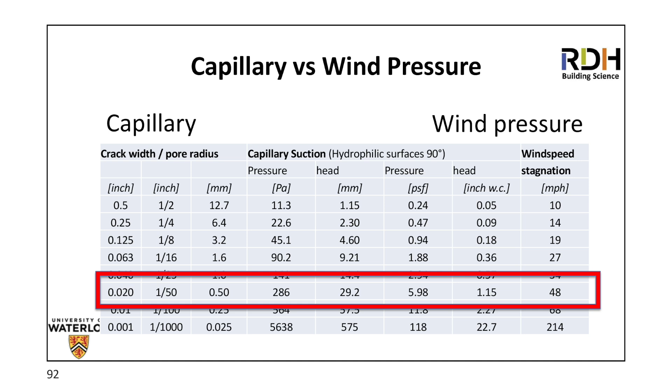Look at the blurs. So finally, I want to take a look at how air pressure affects capillarity and how they interact. I can do this by looking at lap siding—everyone knows about lap siding. It's used in many materials in many parts of the world.

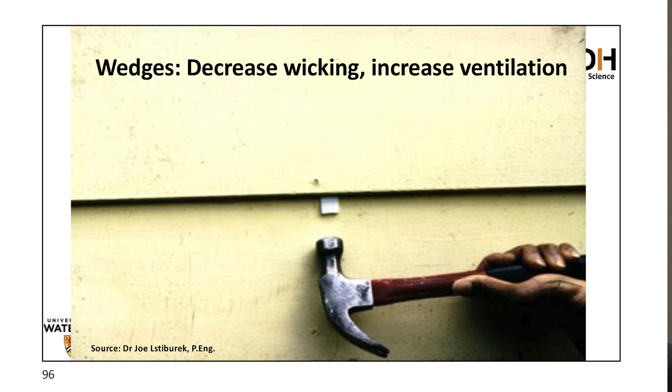And so then you could buy little wedges and put them up here. These are not the ones you did in school, these are the ones you did outside. That gap both reduced the amount of water that would wick in, because it was much larger, and it enhanced air movement. Both were quite important to solving these problems.

So the last video I want to show is something we spent a fair bit of time on, building this little box and getting it to work. It's basically a little box with glass lap siding where we can apply air pressure and drop water on the back side. So we have water draining down this wall system, coming upon a 1-inch lap, and we can impose different air pressures on it and see what happens.

And so now I'm going to build up the air pressure again, and now if I get the pressure too high, you're going to blow the water through. This is not as simple as people say, where, well, I have hydrostatic pressure and then I have air pressure and it overwhelms. The pressure in these systems—the air blows around it at much lower pressures than your calculated number, and it takes water droplets with it. Now, do I care about the water droplets? Depends on the system. But to be clear, it's not like, oh, here's the capillary head, which should be about 25 millimeters here, and it should build up to 25 millimeters and only then will the water come over. If you don't control airflow, it's going to blow air up the backside. And who wants air blowing up their backside?

So on that high note, I'll say that we can end with some conclusions here. Very small gaps do act as capillary breaks—they stop wicking. An eighth-inch gap will be enough to stop bridging across from one side to another. Very small gaps allow drainage and penetration, literally at the scale of a millimeter would be fine. A millimeter and a half is probably pretty good to add a little bit of safety factor in there. But if you see a system in the field and it's like a 32nd of an inch, you can't say it doesn't drain—you now have to say, well, it does drain, because we know that it does.

We didn't get into a lot of how these laps and upstands work, but really you do want to make sure that you don't have big air-leaky holes, because the air will blow through, screw the capillary, it'll just drag the water droplets through. Air barriers—I think most people know air barriers are more than just an energy and indoor air quality thing. They also are related to rain penetration, in that you do need good air tightness to avoid that. So that's why we don't want leaky buildings, right? We want good air quality, hopefully provided by a well-designed ventilation system, because leaky buildings just mean they leak air and water, as well as pollutants and all the rest.